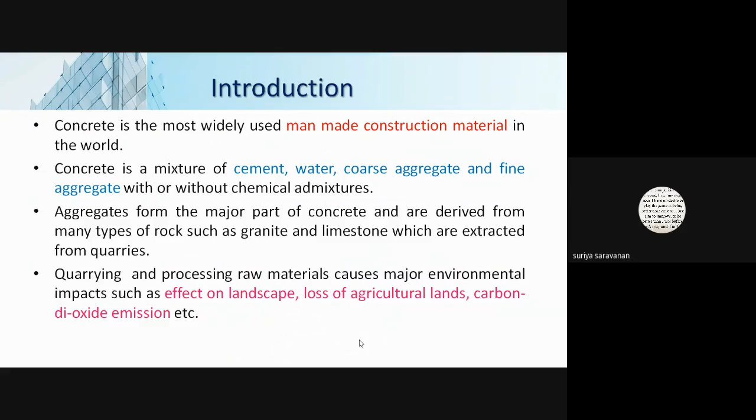Because of this quarrying and processing, it causes a major environmental problem. Carbon dioxide emission is more, and we all know that it is a major threat to the environment. These environmental effects are mainly caused by the mining of rocks. So our idea is that we can minimize this environmental effect by replacing the coarse aggregate with plastic waste aggregate. That is the idea behind this paper.

Plastic use is increasing day by day, and the generation of plastic is also more. They are recycling this plastic again and again, and materials are produced from this recycled plastic. Moreover, when the plastic is recycled again and again, its strength is reduced, so basically it goes to landfill. So our idea is: why don't we use that plastic by partially replacing the coarse aggregate, and determine the strength properties of the material. This is the basic idea behind this paper.

Apart from that, we have also used steel fibers. Because of the steel fiber, the structural integrity of the concrete can be increased. Moreover, the fiber will control cracking in the concrete. Many types of steel fibers are available, but here we have used zigzag shaped steel fiber, since it has been proved in the literature that zigzag shaped steel fiber gives adequate bonding between the materials.

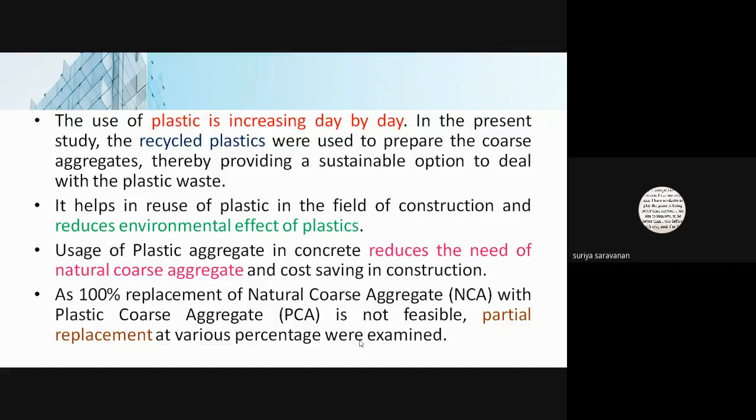The main objectives of this study are to optimize the compressive strength of concrete by partial replacement of coarse aggregate with plastic waste aggregate, to determine the variation of workability of concrete, and to examine the various engineering properties of the concrete by partially replacing it with plastic waste aggregate.

For materials, we have used ordinary Portland cement of 53 grade, since it provides higher strength even with lesser cement content. For fine aggregate, we have chosen M sand because it can provide higher concrete strength compared to river sand. Coarse aggregate is the main one which contributes to the strength of the concrete. Steel fiber, as mentioned earlier, is used to resist shrinkage and cracks. And the plastic aggregate is the plastic waste aggregate.

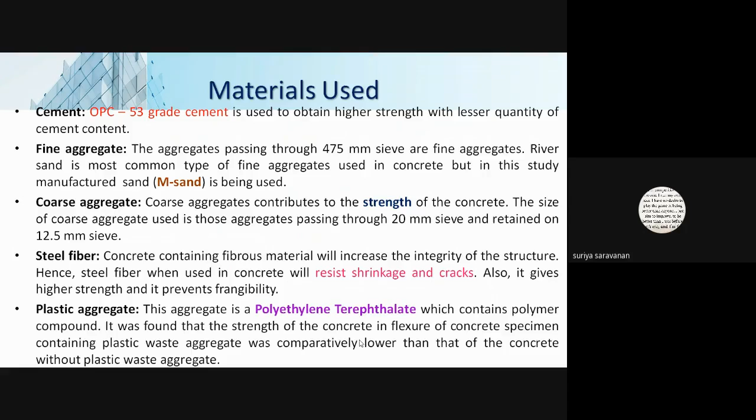In many literatures, they have used plastic waste separately and steel fiber separately, and the combination of steel fiber and plastic aggregate was not found when we reviewed the literature. So we thought to combine these two things and made an attempt. This is the steel fiber we have used in this experiment. You can see the corrugated, zigzag shape. This will help to fill the cracks in the composite member.

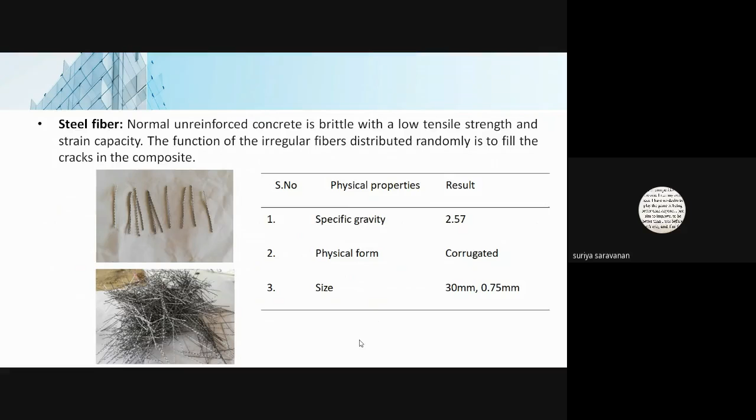This is the plastic waste aggregate we have used in this study. It is a compound of polyethylene terephthalate, and in concrete application it is used as plastic waste aggregate. In the methodology, we have done the literature survey, the materials were collected, preliminary tests were performed, and then we did our mix design as per IS codes and BIS standards.

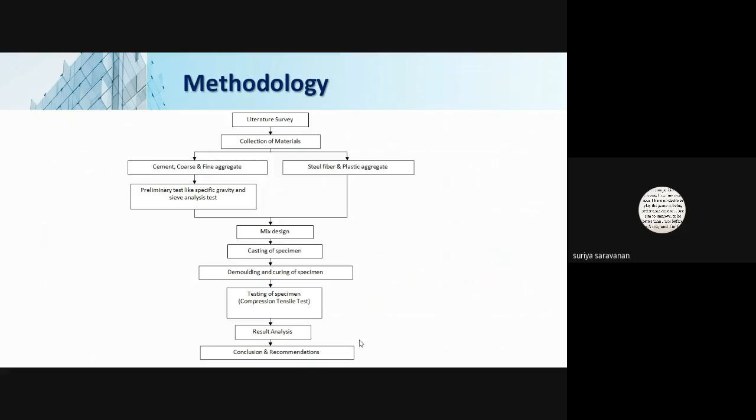Then the specimen has been cast, followed by demolding, curing and testing of that specimen, result analysis, and final conclusion and recommendation. So if you take the mix design, this has been done based on BIS. The grade designation is M30 concrete, the type of cement is OPC 53 grade, and the nominal size of aggregate is 20. Minimum cement content for M30 is 320 kg per meter cube, and the water cement ratio we have adopted here is 0.43. We have placed this concrete manually, and the mix ratio we have got is 1 : 0.75 : 1.5.

And what we have done is that we have replaced. If you take the literature, they have found that if you replace 10 to 15 percentage with plastic waste, some strength can be obtained. So this is what is found in the literature. So we want to proceed still further to find at which amount of plastic content we get an optimum value. So for this particular coarse aggregate, we replace it with 5% of plastic, 10% of plastic aggregate in coarse aggregate, and 15% of plastic aggregate in coarse aggregate. So this is what we have obtained here.

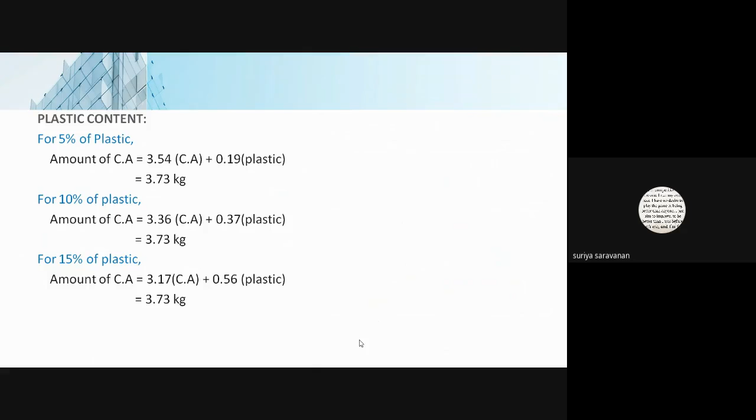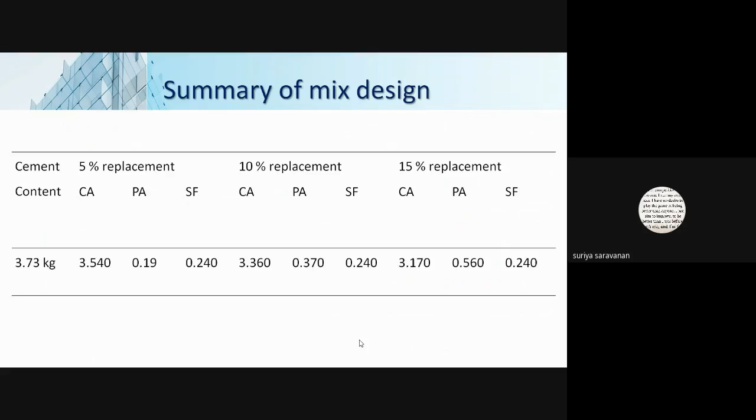So total will be 3.73 kg. In that, we have taken 1.5 parts of coarse aggregate divided by the total parts, 3.25, into the weight of 1 cube, which is 8.1. So accordingly, we have got these values for plastic content. And for each and every mix, we have added 3% of steel fiber of the total weight of concrete, which comes to 240 grams of steel fiber. So we have added that also.

So from this, what we are concluding is that a reduction in compressive strength was observed in partially plastic replaced concrete. The degree of workability is equivalent for plastic aggregate as per the IS code, but the compressive strength is getting decreased. So if the compressive strength is decreasing, we cannot use this type of partially plastic replaced concrete in load bearing structures. We can use it in non-load bearing structures.

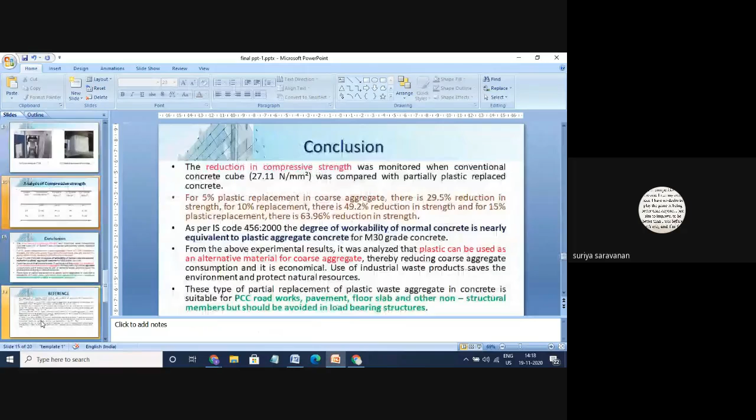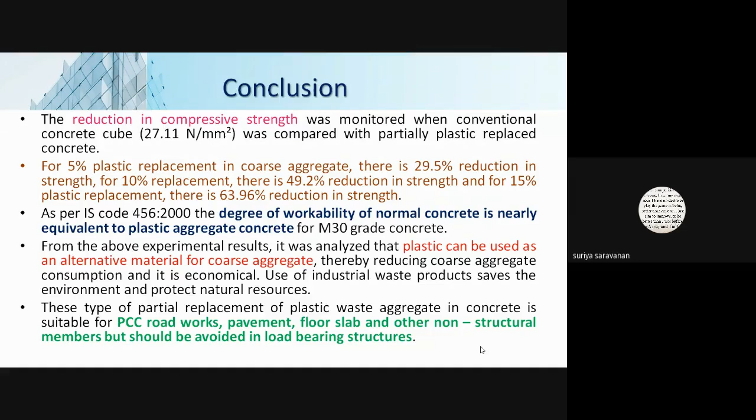Yes, sir. Okay. Is there any basis why you started only from 5%? You have started from 5%, 10%, 15%. Is there any literature saying you should not take anything less than 5%? We can take less than 5% also, and further we can do it. But in the literature they have given that no optimum percentage is obtained. After 15% or 20%, the strength will get reduced. So this is what they have given in the literature.

Okay. Have you done any cost analysis? No, we haven't done any cost analysis as of now, sir. Okay, you can go to the previous slide. Yes, sir. You see, in 15% plastic, after the duration of 14 to 28 days, there is an increase in your compressive strength. Why is that?

Pardon, sir. So you're asking why the compressive strength is getting increased when you see it column-wise? Am I correct? Yes, your question is correct. Specifically 15%, because at 5 and 10%, after 14 days, there is not much change between the conventional concrete and your reinforced concrete. But once you go to 15% plastic, you see that constantly there is an increase in compression strength. Though not as phenomenal as 5% or 10%, you could see that there is an increase. Is there any particular reason?

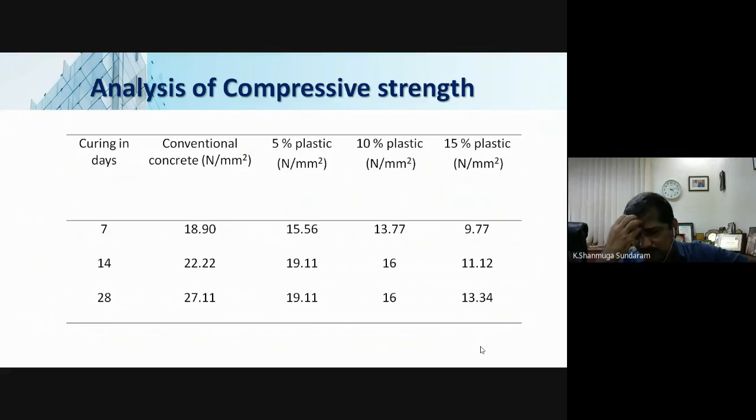No, there is not any particular reason, sir. It shows that if you take the days for casting, the general case is that for 7 days of casting, the strength we should attain is 65%, and after 28 days of casting, it should attain 99% strength. So as you have seen, it reveals that if you replace it with 15% of plastic waste, your compressive strength is getting increased. So it shows that our cost can be minimized. So we can replace the coarse aggregate with 15% plastic waste aggregate. So that's how we have to conclude it, sir.

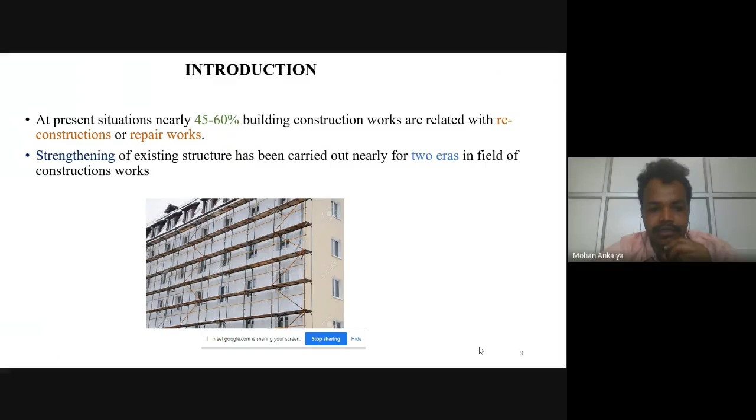My research topic is on textile reinforced concrete. Today's presentation will be on development of binders for textile reinforced concrete as a part of my research work. As of now, nearly 45 to 60% of building construction work is related to reconstruction or repair works. For the past 20 years, the strengthening of existing structures has been a great task. Before the development of textile reinforced concrete, researchers found comfort with FRP, fiber reinforced polymer, as FRP was found to be a promising element in the field of strengthening work.

The main advantage of epoxy is that it can yield high strength, whereas its disadvantage is due to the use of chemical-based resins. The same thing has become a drawback in the use of epoxy. Due to these drawbacks, they replaced the epoxy with a new material with an inorganic cementitious binder, known as textile reinforcement. Textile reinforcement is nothing but textile fragments roved in different directions, parallel and perpendicular, combined to form a mesh type structure.

As the figure indicates, it's a mesh type structure. It is used for strengthening existing structures. When it combines with a cementitious binder, the textile reinforcement possesses high tensile strength. My topic is mainly focused on the development of the cementitious binder, which is a research gap in textile reinforced concrete. For the past 20 years, since the development of textile reinforced concrete, most researchers have not concentrated on developing strength for the inorganic cementitious binder, which is a major gap found through the literature.

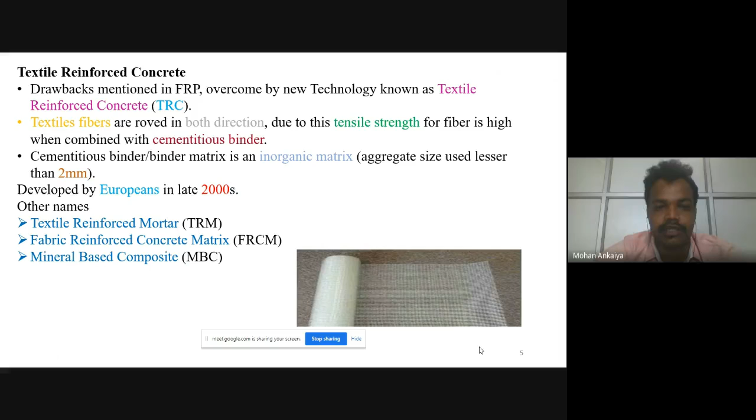The materials used in the cementitious binder have aggregate size finer than 2 mm. There are different types of textile reinforced concrete meshes available, namely glass mesh, carbon fiber mesh, PBO, basalt. In India, as of now, glass and fiber mesh are readily available. And in my research topic, I have adopted AR glass fiber mesh.

So the overview of textile reinforcement is, it is very suitable for renovating reinforced concrete work. It can solve realkalization or reprofiling of the existing concrete structure or reinforced structure. Strengthening of elements is provided by bonding TRC to the element by cementitious binder. Advantages when compared with FRP are low cost, easily formed to any shape, better performance under high heat, applied easily, and no chemical products are used.

So you can compare the size of a single yarn of textile with our human hair. It is basically lesser than the human hair, that is 7 to 27 micrometer, which is lesser than the human hair diameter.

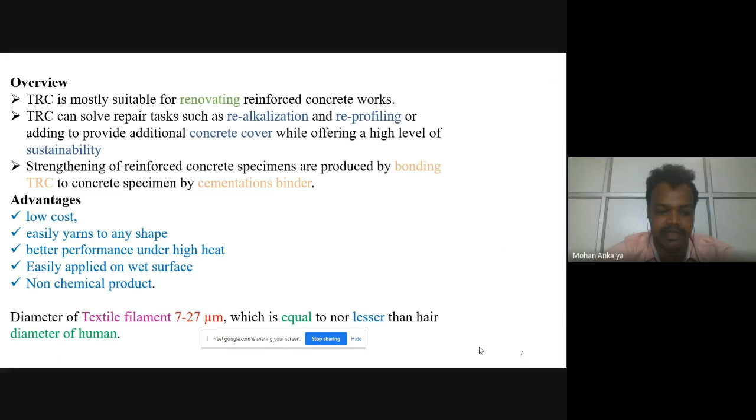So my major objective of the research is to develop multi-purpose textile reinforced concrete, and to prove it is an alternate to FRP, and it minimizes the use of steel in retrofitting and repair work. And today's topic is about the system. It's one of the major gaps which has been found out, and to increase the sustainability.

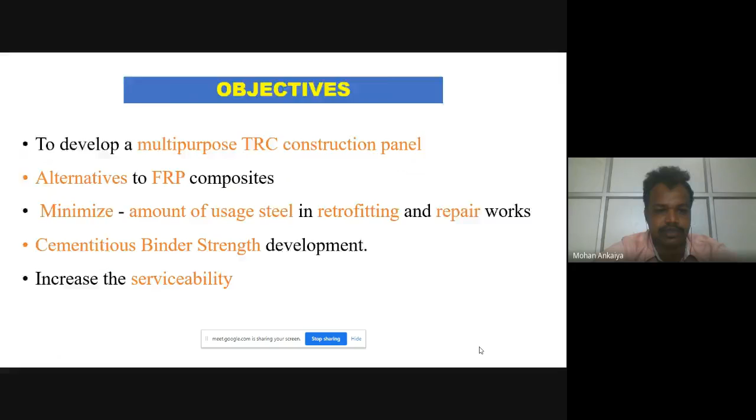As I said, two major defects have been arrived at. One is slippage and debonding of textile fragments, and under high load, the increase in stiffness has been achieved with the TRC and compared with FRP. Slippage and debonding is nothing but when we attach it to the beam surface, when it's acted upon by the load, the fibers may come out from the cementitious layer. So it is known as slippage or debonding or delamination of the textile fiber.

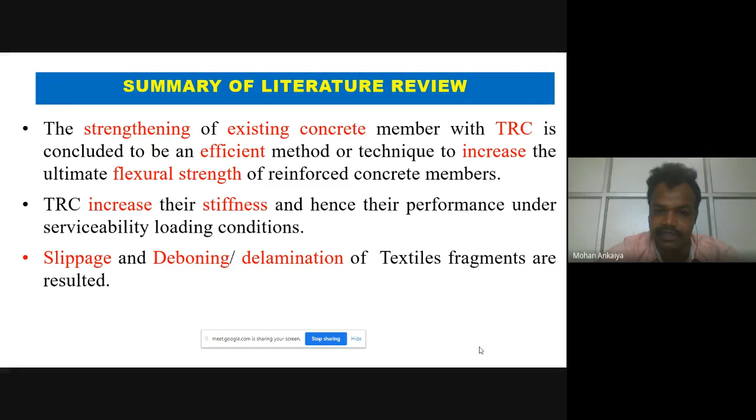For this research work, we adopted M40 grade of concrete, binder ratio of 1:3, and water to binder ratio of 0.4. Three types of binder have been found out as of now. We have named them conventional, modified binder 1 and modified binder 2. In the conventional binder, all conventional material, that is cement and fine aggregate; generally we use passing through 4.75 mm, but in this case we adopted passing through 2 mm fineness, so it is more fine.

And for modified binder 1, in order to achieve higher strength, we implemented more silica, which is the major component for the increment of calcium silicate content in the concrete. So in order to implement more strength, we took cement, quartz powder, silica fume, and similarly for modified 2, cement 50%, GGBS 50%, quartz powder, silica fume, and fly ash.

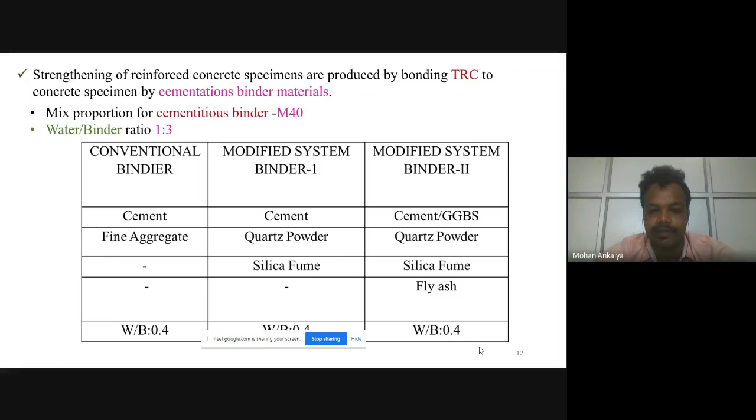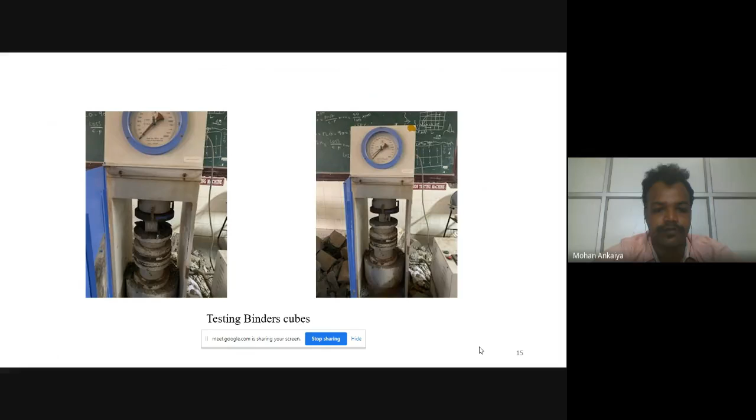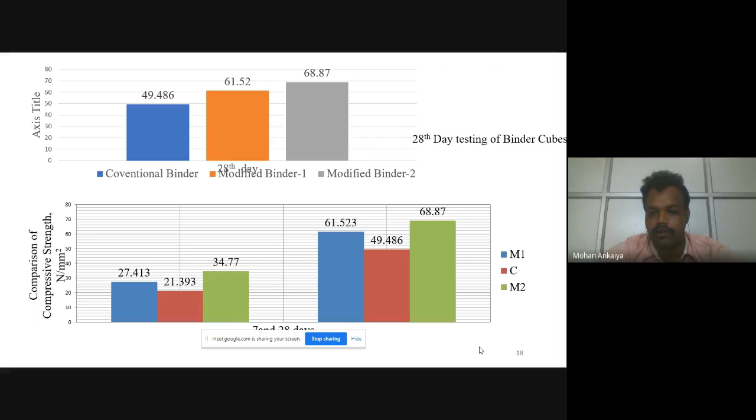In comparison, the modified binder 2 was found to be increased nearly 62.5% for 7 days. It also shows an increase in compressive strength of 39.17 when compared with the conventional binder. Similarly, modified binder 1 showed an increase in strength of 26.8 and 11.94 for 7 and 28 days when compared with C, it was 28 and 24 percent.

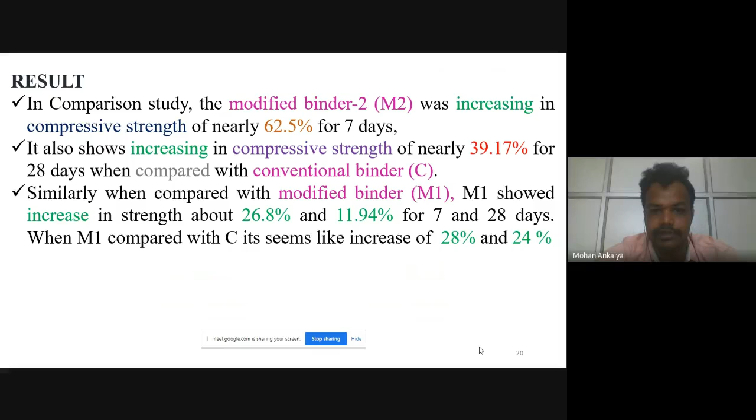That's it, sir. Thank you, sir. Thank you for the opportunity. Yeah, you can stay with the result. Yeah, go to the result. Yes, sure, sir. Thank you, sir.

Rather than just giving the quantified values, can you explain why it has done 62? Yes, sir. Sure, sir. So as I said, for increment of strength in concrete, the major two components are CaO and SiO2, sir. So the particles, that is the aggregate which has been adopted, are more rich in calcium and silica, sir. So this is the reason why both binders show the highest strength when compared to conventional binders, sir.

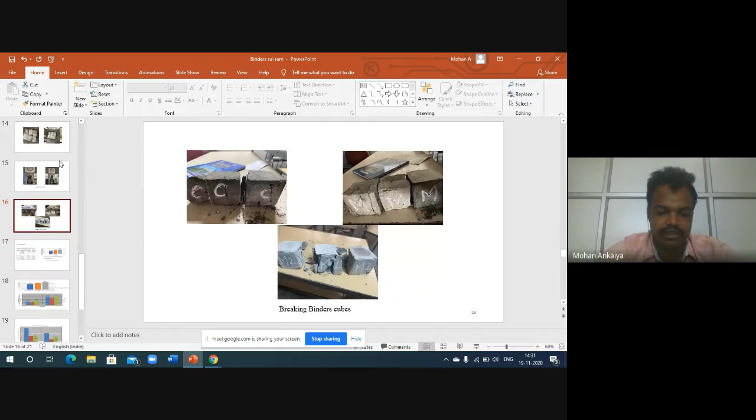So as of now, the research is being carried out. So in future, as of today, we are planning to go for SEM analysis and EDAX to find out why the strength has been increased. So my statement will be that with the use of this SiO2 content and CaO content material, the strength has been increased.

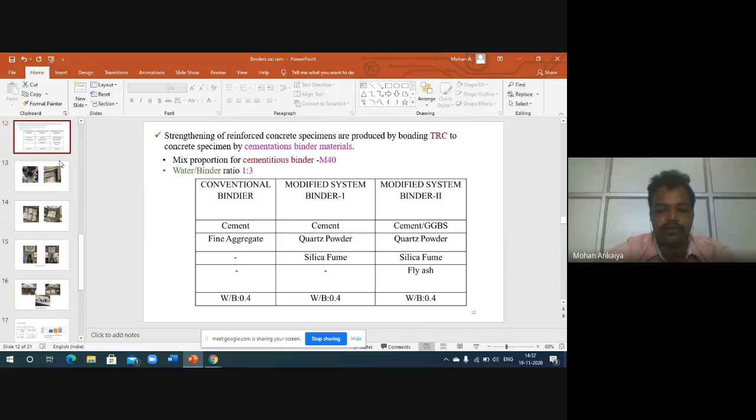Can you just conclude with only the characteristics of compression strength, or should any other characteristics of your concrete be included in your study? No, sir. Today's presentation is only on compressive strength, sir. We did more on the strength after the pandemic, so it's going on, sir. But for a conference, I just published with this paper. So they said apart from this, nothing should be displayed. So I stopped here, sir.

Okay. Thank you. Yeah, sure, sir. All the best. Thank you for the opportunity, sir. Mainak Saha, sir, are you ready? Yes. Now you can present. Just a second. Is the presentation visible? It's coming, sir. Now it's visible. Okay.

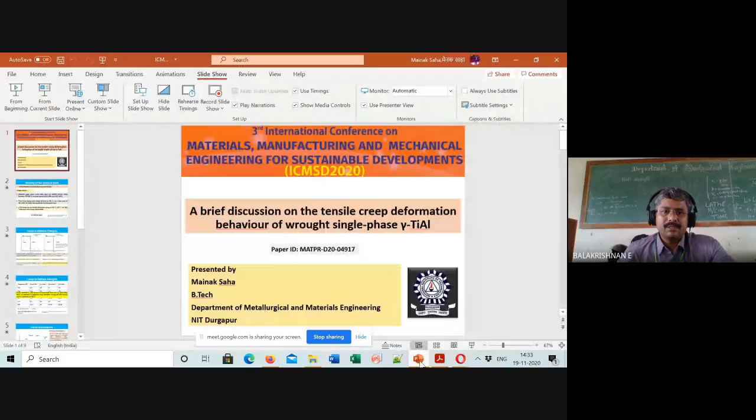Thank you. Okay, so very good afternoon to all of you. So today I, Mainak Saha, am going to briefly discuss the tensile creep deformation behavior of wrought single phase gamma TiAl. Now this is a single phase FCC alloy. And what I am going to explain is as follows. Firstly, I will be speaking on the novelty of the present work.

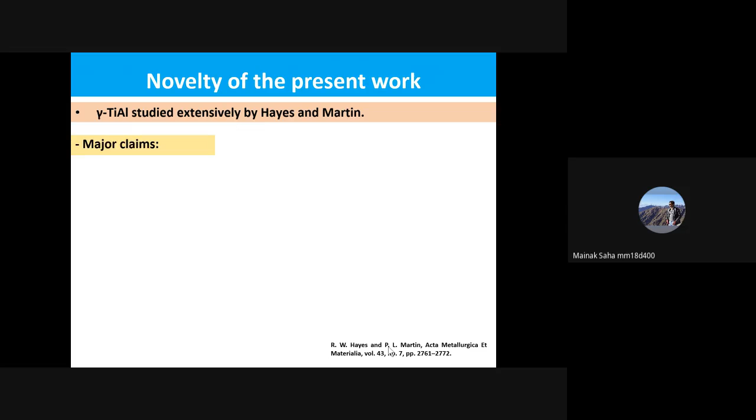So the gamma TiAl has been studied extensively by the work of Hayes and Martin, long back in the 1990s. But there were a few things that were missing in that particular work. First of all, the major claims made by that work are as follows. The wrought single phase gamma TiAl alloy does exhibit tertiary creep between 760 and 900 degrees centigrade with stress levels of 69.4 and 103.4 MPa. Now, this was one of the major claims.

The second claim was that there is no steady state creep observed at 832 degrees at a stress level of 69.4 MPa for both interrupted and uninterrupted tests. In this literature by Hayes and Martin, it was mentioned that the interrupted test was interrupted at 2 strains, that is 0.18% of the total strain to failure, and at 0.5% of the total strain to failure. And the uninterrupted test was done till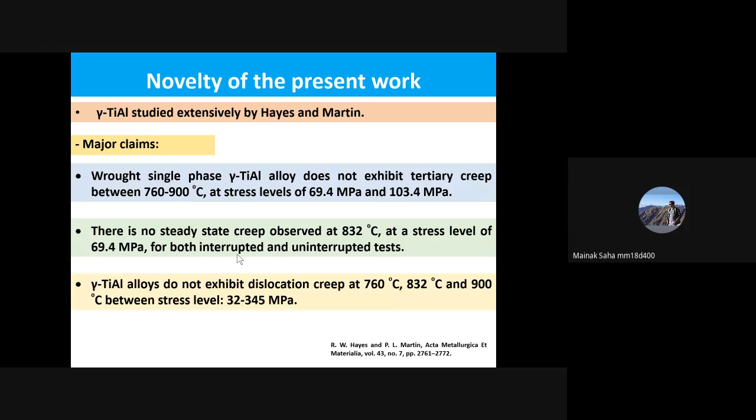the fracture. And the third claim was that the gamma TiAl alloys do not exhibit dislocation creep at 760 degrees, 832 degrees, and 900 degrees between stress levels of 32 to 345 MPa. Now this forms the novelty of the present work, because the present work mathematically tries to review whether the claims are really true or not. Is that really the case?

Okay. So in order to explain this, firstly, the creep activation energies have been determined. These are the two plots. First of all, this is the strain rate, epsilon dot, which is plotted as a function of 1 by T, where T is the temperature in Kelvin, and the other one is the Sherby-Dorn plot.

Okay, so that is the Sherby-Dorn parameter. It's basically coming from the Sherby-Dorn parameter. This is the reference which gives the basis for the Sherby-Dorn parameter, and that is the temperature compensated time approach. Based on that, we can easily see that the creep activation energy, which is basically nothing but the slope of this particular plot, the slope of this log strain rate versus 1 by T plot.

We find that in the first regime, it is coming out to be 423.9 kilojoule per mole, and 409.82 kilojoule per mole in regime 2. Now secondly, the regimes 1 and 2 seem to be independent of each other, that is, they do not have to happen in a sequence. Their occurrence is independent of each other, rather to say. And thirdly, the transition temperature, which is the most important here, is exactly observed at 838.11 degrees centigrade in both the approaches, in both the cases.

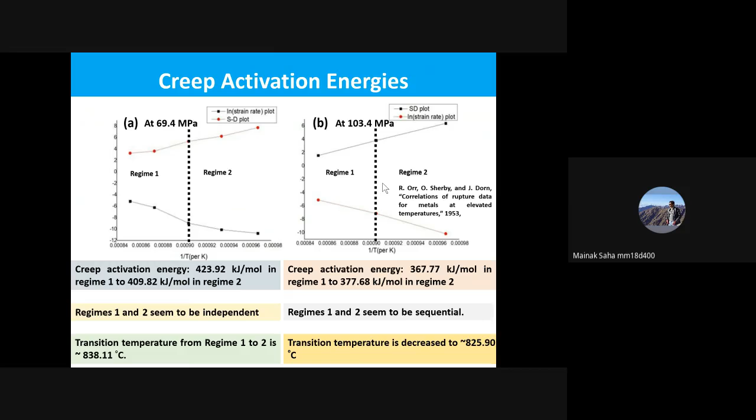So with this, I'll move to this approach. Now, at different stress levels, 69.4, and at all these temperatures, 760, 832, 900 degrees, all have been taken from the work of Hayes and Martin, wherein mathematically the activation energy has been found as follows. That's what interestingly we can observe. So this is the creep activation energy, and these are the components of the creep activation energy, because the QGB is the creep activation energy at the grain boundary, and the QL is the creep activation energy for the lattice, as you can see very clearly. What interesting observation we can see is that this total Q, the QGB and QL, have been calculated using Ashby's approach, and a very good formula for calculating such components of Q can be easily found in this particular work. It's a paper from very long back, but it definitely provides a lot of inputs about calculating the value of creep activation energy.

So from this, the interesting observation that we can get is as follows: at 832 and 900 degrees, with the increase in stress level from 69.4 to 103.4 MPa, there is a decrease in the apparent creep activation energy, but the reverse trend is observed at 760. In other words, when I increase the stress level from 69.4 to 103.4 at 760 degrees, we find that the activation energy, instead of decreasing as it is found to be decreasing at 832 and 900, it is increasing at 760 degrees. Now, this is some observation which is very, very interesting. But of course, this requires extensive microstructure analysis, which is beyond the scope of discussion today. But definitely, this kind of work is going on.

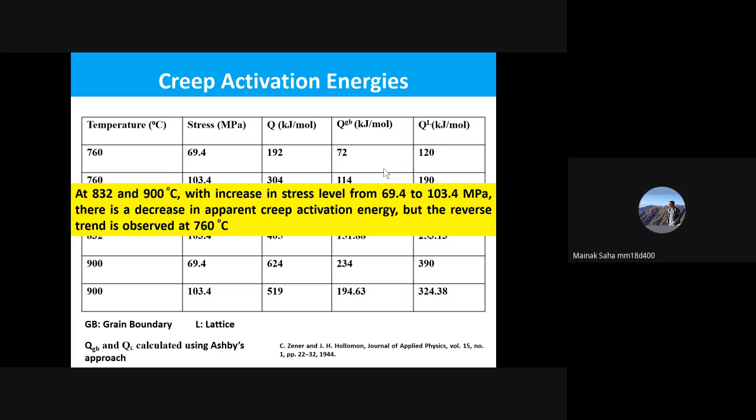So with this, let's discuss the creep mechanisms. Okay, so mathematically, how do we arrive at the creep mechanisms? We can arrive using this particular approach. We can plot the minimum strain rate, take the logarithm of the minimum strain rate, and take the logarithm of the stress, and then for the 3 different temperatures, 760, 832, and 900 degrees, we can have this particular plot. From this plot, we can easily find out the stress exponent. It's nothing but the slope of all these plots at different regimes.

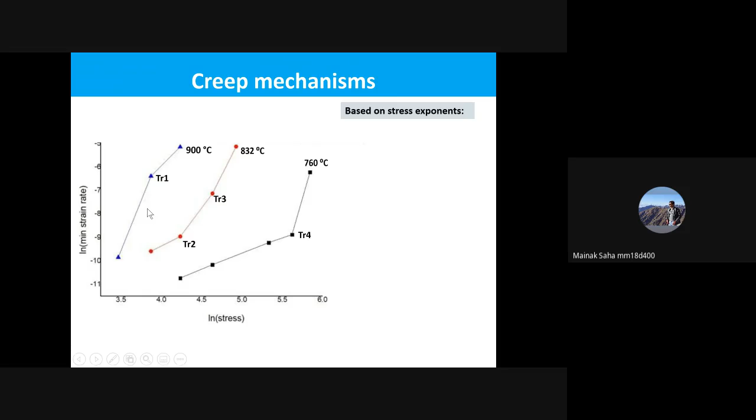So what we can find out is that TR1, which is equal to 44.69 MPa - this can easily be found when we extrapolate this data and find out the logarithm. It's in logarithm, so it's 44.69 MPa. The plot suggests that there is a transition from dislocation glide control creep to dislocation climb control creep. Similarly, for the second case, at around 832 degrees, we find that the transition stress is slightly higher, 66.68 MPa, where there's a transition from the dislocation glide control creep to dislocation climb.

However, there is a minor transition at TR3, and the stress exponents here do not vary to a huge extent, so definitely no such statement could be made for the TR3 transition. But when we look at 760 degrees centigrade, where we find the transition stress, TR4 is comparatively at much higher stress levels, around 270.46 MPa.

So now we are clear with two things: first, we know about the creep activation energy at different stress levels—69.4, 100, and 103.4—at each of the three different temperatures, 760, 832, and 900. We also have some rough idea about the creep mechanisms there. Obviously, microstructural investigation also has to be supplemented, but that has not been provided here.

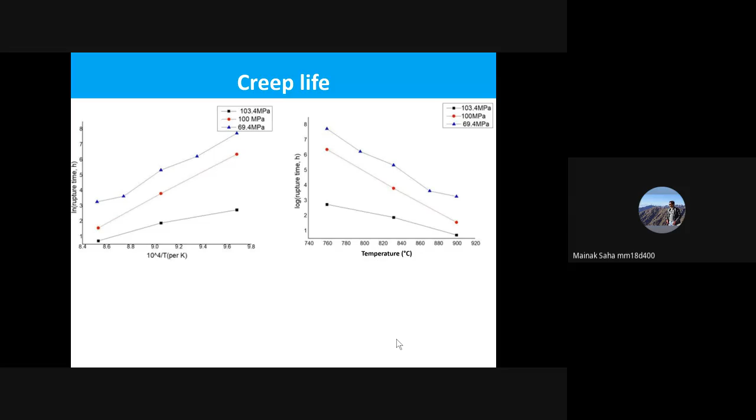So once we have an indication of the creep mechanisms, what we need to know is the creep life, because every material has to have this. It is always desirable to have an engineering material with a very high creep life, otherwise the material cannot be used for engineering applications, especially at elevated temperatures. So in that case, there are two very common approaches.

The first is the Larson-Miller parameter approach, where we plot the rupture time in hours on a logarithmic scale as a function of 1 by T. I've taken 10 to the power 4 just to scale these values up, otherwise this would come out in decimals. So it's 10 to the power 4 by T, and T is in Kelvin, so this becomes per Kelvin.

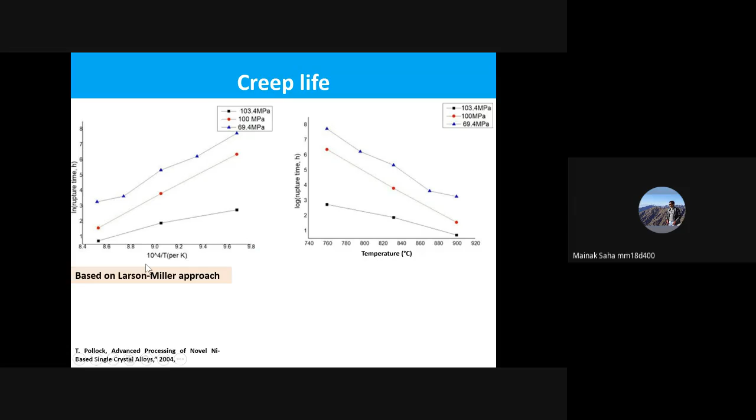What we observe is that with an increase in stress levels from 69.4 to 103.4, the creep life decreases between 760 to 900 degrees centigrade.

Similarly, this is another approach, the Manson-Haferd approach. Here again, what we can say is that with an increase in temperature from 760 to 900 degrees, the creep life decreases for stress levels of 69.4, and as you can clearly see, also for 100 MPa and 103 MPa. So we now have some indication of the creep life as well.

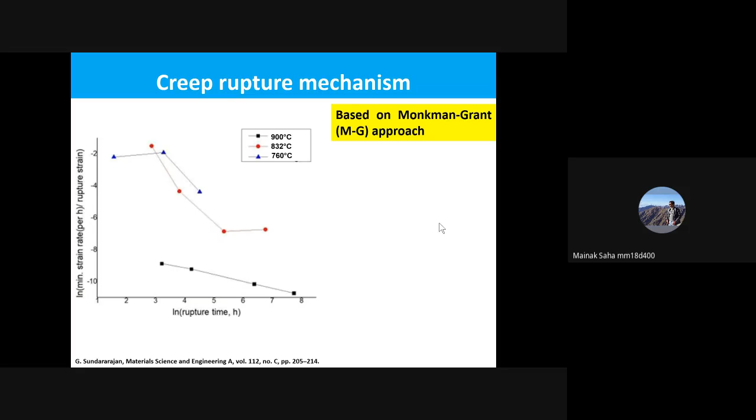But then there is another phenomenon that needs to be addressed, and that is the creep rupture mechanism. This can easily be addressed using another mathematical approach, the Monkman-Grant approach, and based on that approach, what we can say from this particular plot is as follows.

The predominant creep rupture mechanism is a power law breakdown at 760 to 832 degrees. The reason I say this is because the Monkman-Grant exponent, which can easily be extracted from this plot, is in both cases found to be less than minus 1.4. In the second case, at 900 degrees, there is no power law breakdown because the Monkman-Grant exponent is nearly equal to 0.4, which is comparatively much greater than minus 1.4.

So we can now get an indication that there is a power law breakdown at the first two temperatures, 760 and 832, but no power law breakdown at 900. But again, this is also subject to further microstructural analysis.

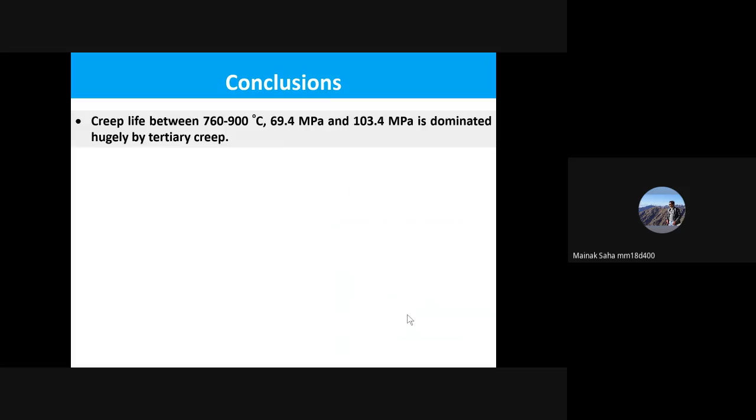So with this, the present work concludes a few things: the creep life between 760 to 900 degrees, and between stress levels of 69.4 and 103.4 MPa, is dominated hugely by the tertiary creep.

So secondly, the earlier claim was that there is a steady state creep observed at 832 degrees for 69.4 MPa for interrupted tensile tests, but we definitely do not see that. Based on the activation energy and stress exponents, we can say there is no steady state observed at that particular temperature and stress level, even for the interrupted tensile creep tests.

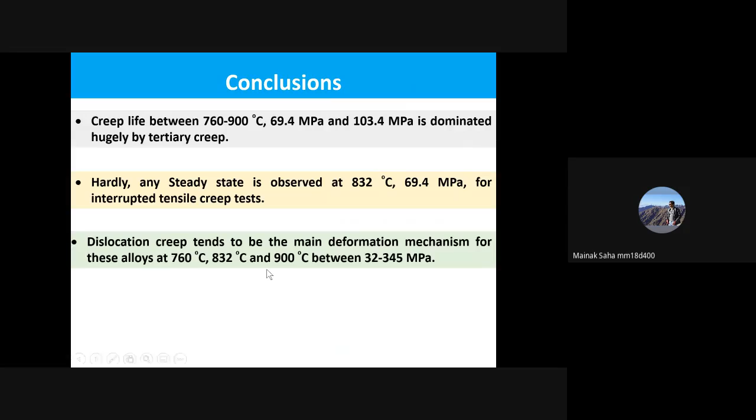Thirdly, the dislocation creep, as discussed in an earlier slide, tends to be the main deformation mechanism for these alloys at temperatures of 760, 832, and 900 degrees, and between 32 to 345 MPa, where the dislocation creep may be dislocation glide controlled or dislocation climb controlled. But this creep mechanism was not discussed at all in the earlier work. This is a very new direction, not discussed in the major work or in subsequent works on gamma TiAl.

Fourthly, and most importantly, the creep life of the alloy decreases due to the onset of creep rupture, as discussed earlier, with increasing stress between 69.4 to 103.4 MPa and temperatures between 760 to 900 degrees. With this, I would like to conclude my presentation for today. Thank you.

Why do you always restrict between 69.4 and 103.4 megapascals when you could have the dislocation creep between 32 to 345 megapascals? So within that 32 to 345 range, this has been taken from the earlier literature, which says that dislocation creep can be observed there. But for 69.4 and 103.4, they have provided a list of activation energies, as well as other data like the creep rupture data, stress exponents, and so on.

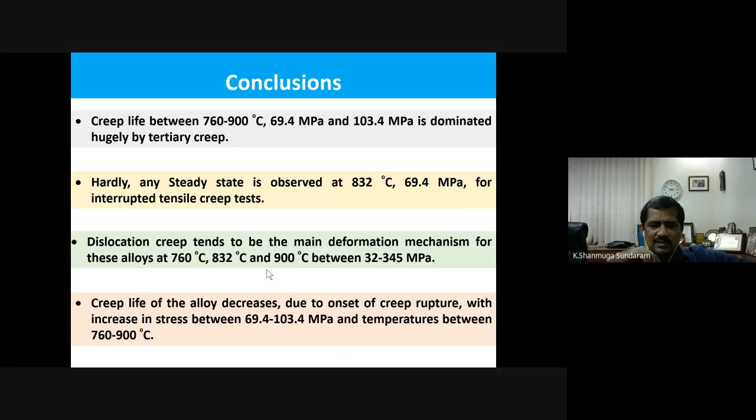What is the application of your material, where is it used? Generally it's a high temperature material, mostly used for aerospace applications and industries. In which component? Especially in turbine engines, gas turbine engines. What temperature would it be? Do you think that at 900 degrees centigrade, if it goes into tertiary creep, it will work well there?

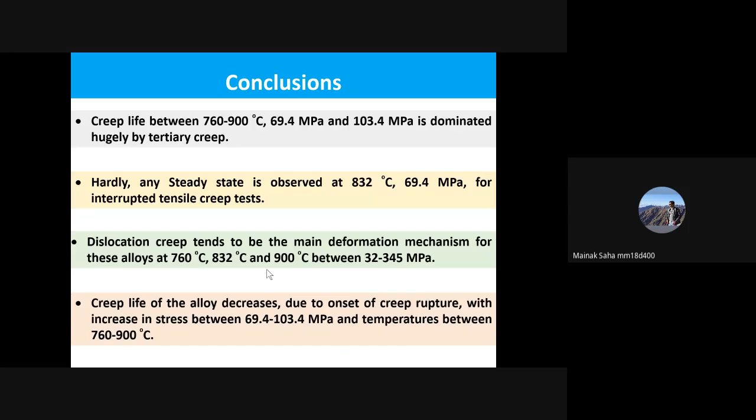No, that's the issue. This material, first of all, the idea at present is to make use of such a material in aerospace industries. I'm not saying it is currently being used there, but this material has potential and people have been trying to use it in gas turbine engines. It has not been used there yet, not at present, it's not possible currently.

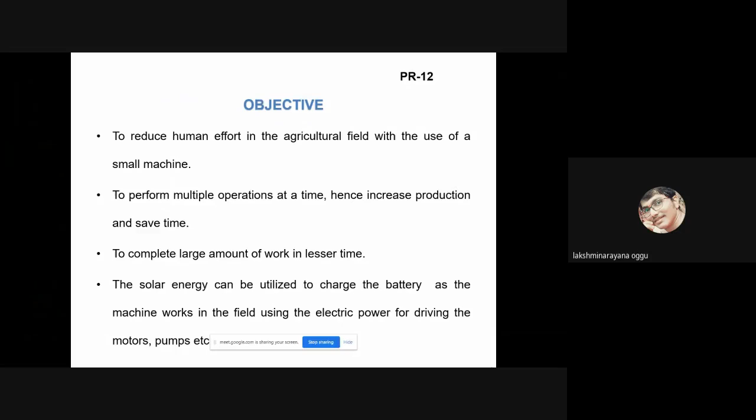The introduction of our project. Today India is second in the world. The main problems faced by our area people are crop monitoring and water resources, input cost, and skilled labor. So to overcome these problems, we are introducing new machines to increase the production rate of agriculture. This machine is designed in such a way that you can perform multiple operations at a time, so it increases the production rate with lesser time.

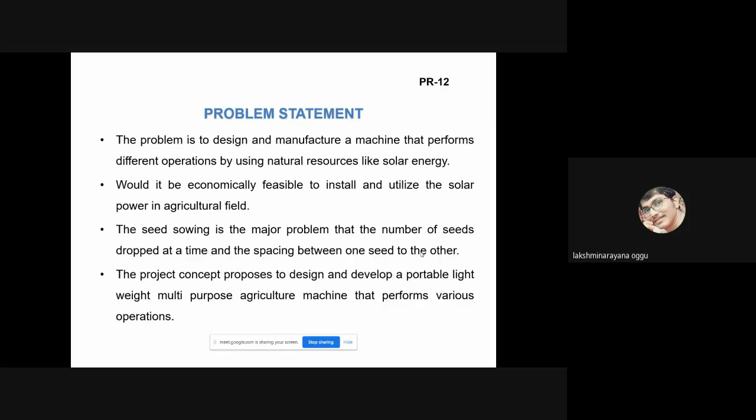I will show the block diagram of our project. The problem statement is to manufacture our machine to perform various operations at a time, and mainly to convert the solar energy to electrical energy to drive the motors in the agriculture field. The project concept is to propose and develop a portable, lightweight multipurpose agriculture machine. So block diagram.

These are the components we used in our project. DC motor as a drive motor, 24 volts, 200 rpm. For seed sowing we are using a 12 volts, 60 rpm DC motor. For grass cutting, 1000 rpm, 12 volts DC motor. And 2 batteries to store the energy, which are 12 volts, 7 amps. And a solar panel of 12 volts, 20 watts. Water pump for water or pesticide spray. 5 volts relay, which is connected by Bluetooth. You can operate it by using a mobile phone also, sir.

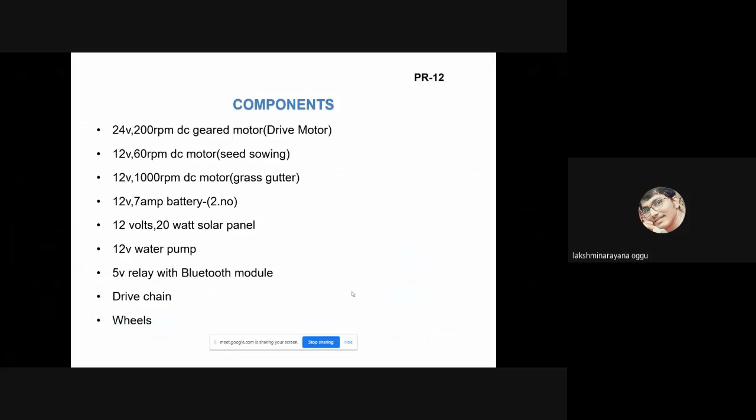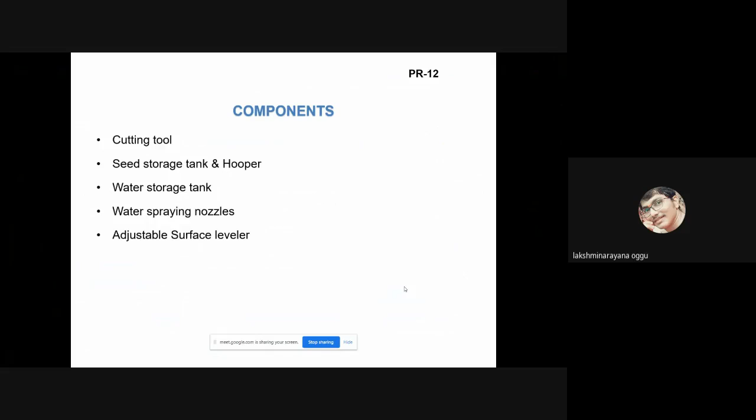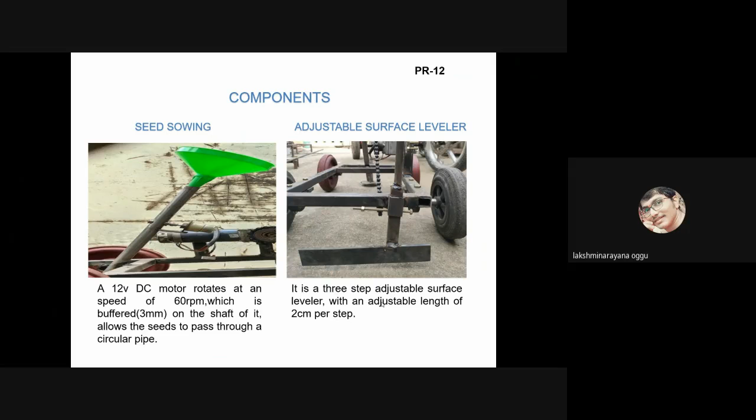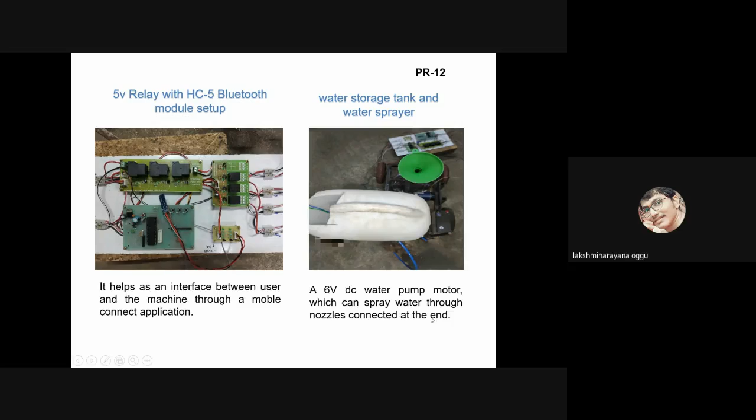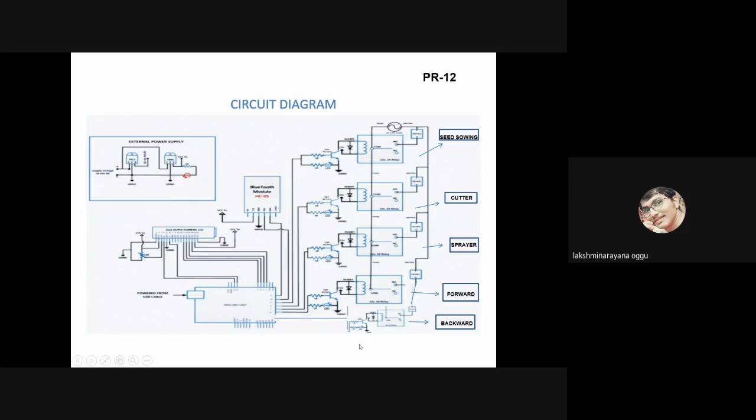Narayana, can you explain how it will work? The working principle you can explain. Yes, sir. We have the 5 volts Bluetooth module, sir. An app is available in the Play Store. You can download and install it, search for the device nearby, meaning the Bluetooth module, and connect it. There are 5 different operations for seed sowing, water spraying, and front wheel drive. You can switch them on by using the mobile itself.

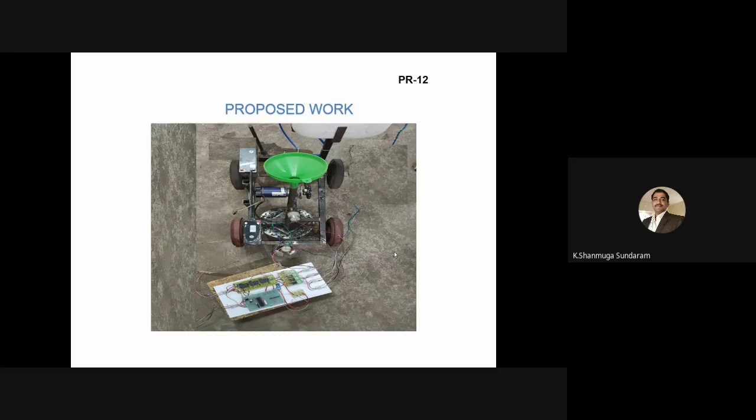Conclusion. This project is used for farmers to reduce their effort, and they can perform multiple operations at a time, so they can decrease the input cost and they can increase the efficiency.

What is the total weight of the machine? I understood. What is the total weight of the machine? Total weight, sir. All subcomponent assembly you made, and what is the total weight and total cost? Total cost is 13,000, sir. Weight? Weight I didn't. Okay.

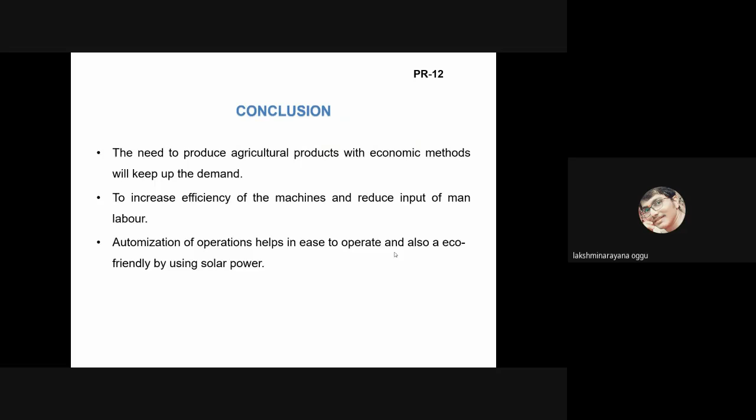Do you think that the 4 wheels that you have selected would be able to move on agricultural land? You tried it out? Yes, sir. You tried in normal, sir, but you didn't try in wet. Normal land, you tried it, sir.

So can it be used for seeding? What kind of seeds you tried? What size of seeds, what land, because there are different types of land. Yes, sir. As you could see, it could be like clay sand, some could be like a red sand, and moving on different terrains, it would be a different challenge if you are going to make low cost machines.

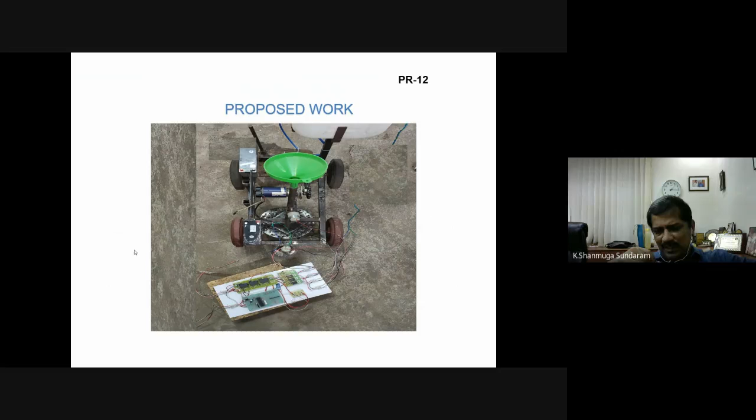Of course, we are happy that you are coming out with a product, but you have to keep all these things in your mind when you are going to design, and when you are going to go for novel substitution. Only if it is advisable they would think about using it. Otherwise, the labor is cheap, and if it is for a very small region, this may not be serving the purpose of what agriculturalists need. So you should make a plan and accordingly make the improvements in your project.

Okay. Yes, sir. Thank you. Thank you, sir. Sir, thank you so much, sir. Actually, sir, they did the DE project and completed it successfully, sir. But still, whatever you told, further improvements we will try to implement. Okay. Thank you. Thank you, sir. Thank you very much.

Dharnidhara and Vishwa, are you there? Sir, yes, sir. Are you ready to present your work? Yes, sir. Mr. Vishwa, now you may share your screen. One second. Hello, sir. It is visible. Yeah, it's visible now. Maximize the screen and start the presentation. Yes, sir. Good afternoon, everyone.

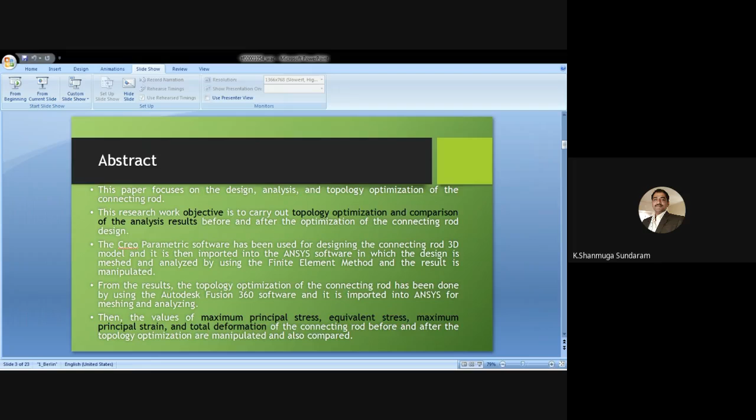The topology optimization model is again imported into ANSYS and it is again analyzed. Then finally, we compared the maximum principal stress, equivalent stress, maximum principal strain, and the total deformation of the existing model and the optimized model, and that is the final result. Sir.

Introduction. We all know that every vehicle which uses the IC engine requires a connecting rod for transmitting the motion of the piston into the crankshaft. The large end is connected to the crankshaft and small end to the piston. The part which connects is the shank. The connecting rod is exposed to high compressive loads due to the fuel combustion. By comparison, the inertia forces are much negligible, so we have not considered them during our design.

Connecting rods are manufactured using steel, forged steel, aluminum. In our research, we used steel as the material. And the connecting rod cross sections are square, rectangular, circular, I section, H sections. In our research, we used an I section connecting rod. Though various researchers are working on connecting rod optimization, people are expecting the best designs. Design calculation: we consider the specifications of the engine.

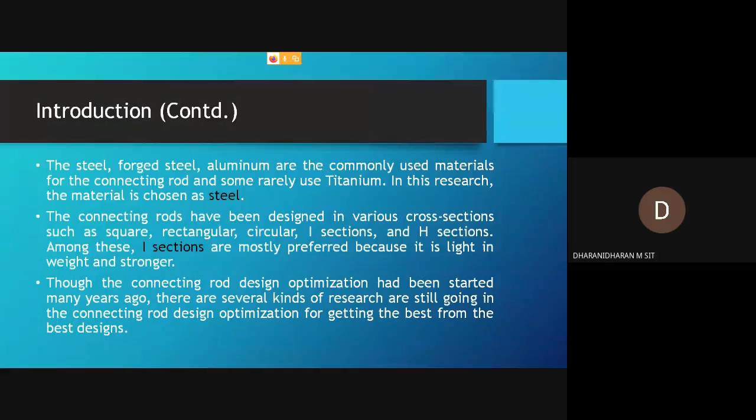Okay, now it's visible now. Right. Yeah. Design calculations. Can you see, sir? Design calculations. Yes, you may continue. Okay, sir.

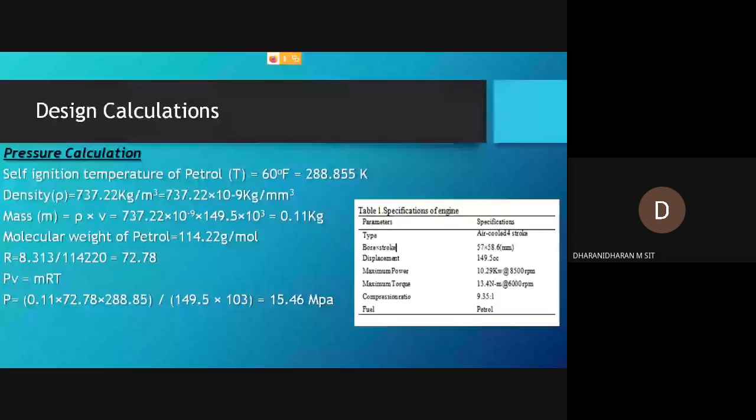We have designed the connecting rod based on the specification of the Suzuki engine, which I have tabulated on the right side. Based on the engine specifications, we have designed this connecting rod. This is the pressure calculation. By using the gas equations, we find the pressure 15.46 megapascal. And this is for the I section of the connecting rod calculation.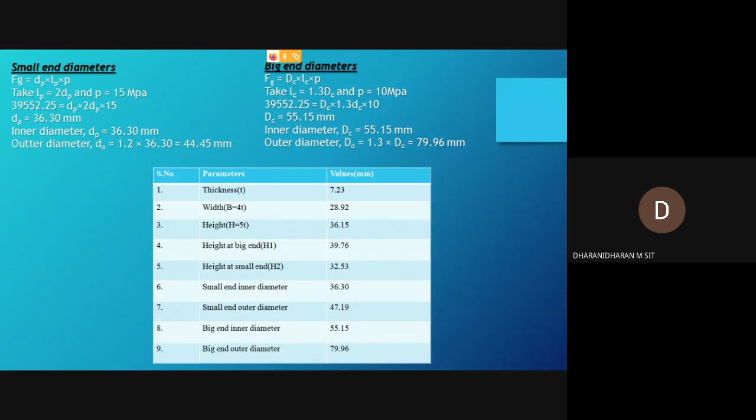outer diameter. This table shows the specification of the connecting rod, like thickness, width, height at the big end, height at the small end, small end diameter, big end diameter, like that. Then the design of the connecting rod will be proceeded by my friend Vishwa.

Yeah. Hello, sir. Can you hear me, sir? Yeah, I can hear you.

Yes, sir. First of all, we started designing our basic connecting rod with the dimensions we got from the calculations. That is the design you are seeing, sir. The design is done in Creo. Then we sent it for analysis in ANSYS. After the analysis, we got the report from that.

So we checked which parts of the connecting rod are experiencing less load, but metal is used in those parts. Then we underwent topological optimization, so that we remove the material wherever it is not necessary in the parts of the connecting rod. Then the next slide, Danny.

Yeah, we had done the topological optimization in Fusion 360, sir, because it is one of the software which has this facility, in which we have to specify the constraints where the load is, where there is a minimum thickness, and what materials we can apply. Based on these values, the software itself checks the possible areas where we can reduce the material. Based on that, we reduced some material from our connecting rods, so that we can reduce the weight, and also we can reduce.

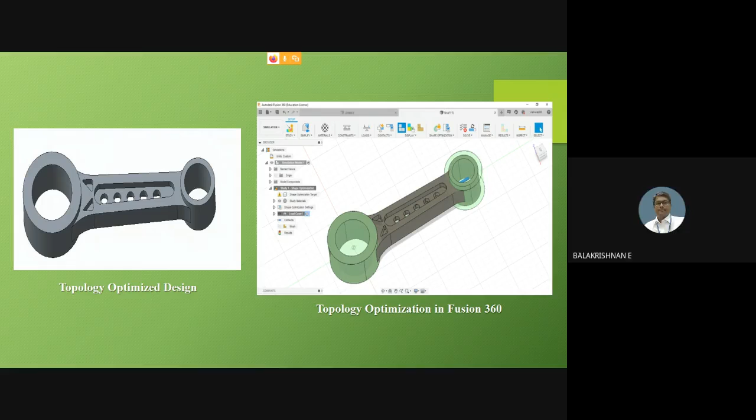So that we can reduce material, and also reduce weight, sir, which will definitely improve the efficiency of the machine, sir. That's why we did it. Then next slide, Danny.

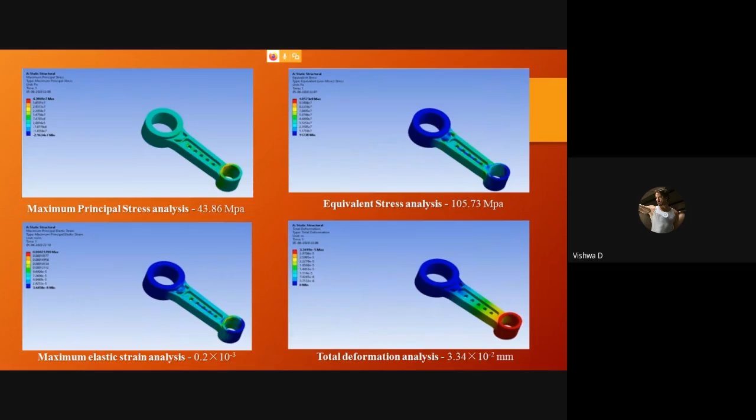Yeah, and we also double checked after removing the material, so that we can confirm that the material-removed connecting rod is also safe to use in the engines. So we again performed analysis on the topologically optimized connecting rod. That is the image you are seeing on the screen, sir. You can see that there is no performance reduction, but the material reduction you can see on the screen, sir. Okay, next slide then.

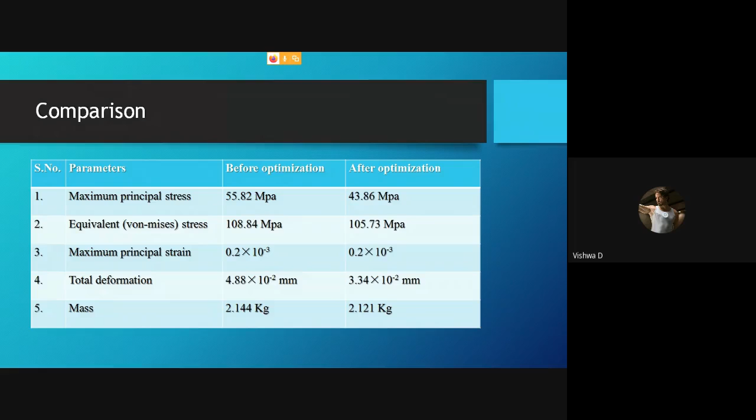Yeah, conclusion will be continued by Danny then, sir. Then you may continue, Danny.

Yes, sir. Based on the results obtained from our research, we conclude that the maximum principal stress, equivalent stress, maximum principal strain, and total deformation are less in the optimized design compared to the initial design, with a weight reduction of about 3.5%, when we applied a force of 39,473 Newton, which is the gas force during combustion in the engine, based on our calculation.

And in our research, we have done the topology optimization in the shank region, which, as I already told, connects the bigger end and the smaller end of the connecting rod. It can also be done in other regions, but in this research we have done it in the shank region only. This connecting rod can be used for manufacturing, which is lighter than the existing one, and it can withstand the same load, with less stress produced than the initial design.

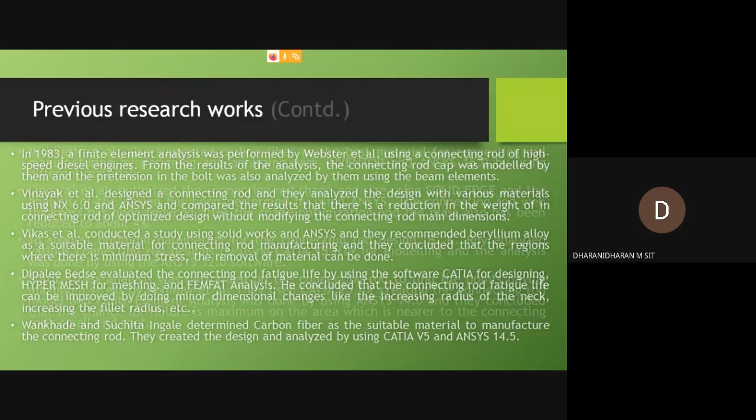These are the previous research works we have referred to, sir. Then these are the references we used for making our paper. That's all. Show me the first design and your final design. Yes, sir.

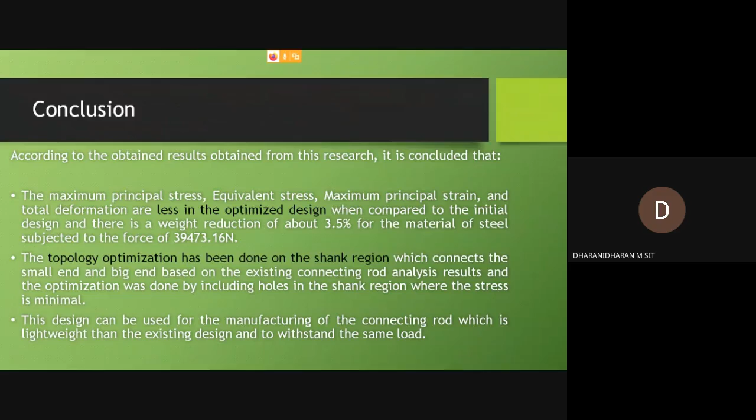Why did you want to save only 3.5% of material? This is a simple geometry. Why can't you think of, wherever the maximum principal stress along X, Y, Z comes, you can think of increasing the thickness there. Probably in additive manufacturing, you have so much flexibility to manufacture.

So rather than just one geometry that you develop, think of developing concepts for at least 5, 6. Try to compare all of them and come out with a conclusion rather than just taking one single optimized decision, because your Fusion 360 tries to give anything when you just give an input. So you will have at least 5, 6 concepts.

Try to evolve a consolidated table for the existing connecting rod and the 5, 6 concepts, and thereupon come to your final conclusion. Because rather than taking one to one, which is definitely giving you a mild increase. Yes, sir. Do that. Okay, all the best.

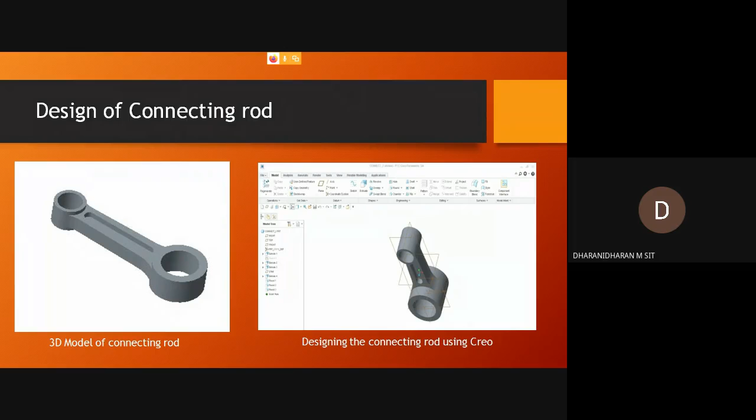I would first thank the management of Sairam Engineering College for keeping all the faculty and the education community connected by conducting these kinds of virtual conferences. And I'm quite happy that this is the third such series of conference, happening once every year. And in spite of being in lockdown, in spite of so many difficulties in learning, I could see all the undergraduate students, postgraduate students, and research scholars have kept themselves occupied doing whatever is possible, and the quality of work was also commendable.

And when we start interacting and sharing, it is always a platform in which we try to evolve, learn things and augment our work. So I would be happy if all the people who have presented here do not stop with it. And of course, I could find a few of the research scholars and the undergraduates who have presented. Two of the batches, do not stop with this. Try to make it into a full-fledged product.